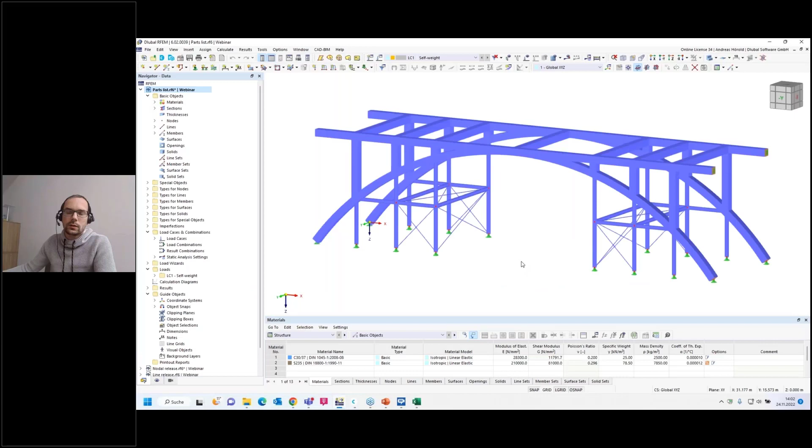Okay, then I will open the program and start with the first question. The first question is how to create a parts list in RFEM 6 and RSTAB 9. That's quite easy: you only have to click here, calculate, and then generate parts list.

Okay, I increase the table, and you can see there are concrete members and members of steel with different cross sections. You can see the volume, the unit mass, and the total surface area.

Now, maybe if the steel members will be coated with paint or something like that, you have the total mass, etc. Then you can change the table, showing by material the total mass of the concrete members and the total mass of the steel members.

And it's possible to export that parts list and open it in Excel. Then, if you want, you can modify the table.

For example, if you want to have only the steel members in the table, then you can delete the concrete members.

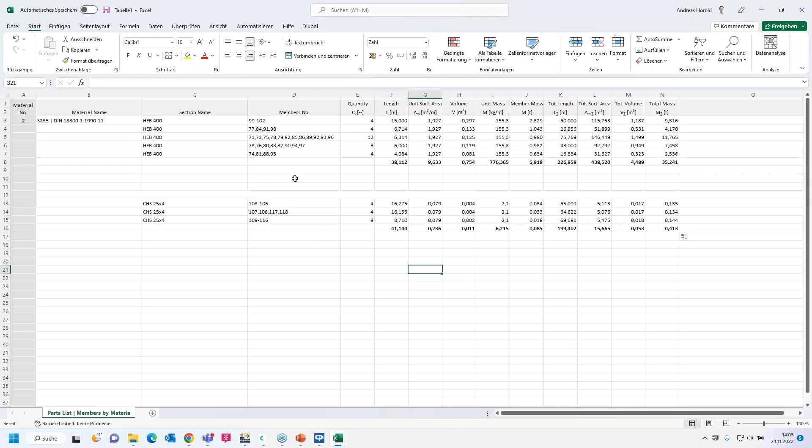Okay, I turn back to the program. It's also possible to print the parts list in the printout report.

I activate one and deactivate the other, printing only the parts lists in the printout report.

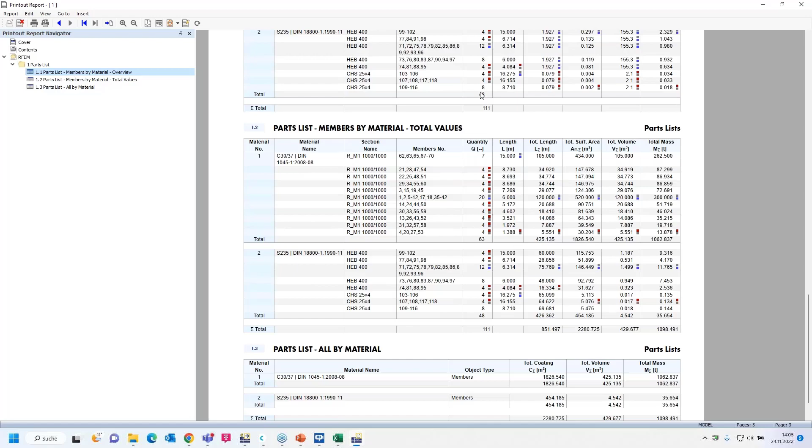Okay, now you can see the parts lists here. I can close the printout report and turn to the next question.

Now, before I do that, I change the model. The next question is how to release nodes and lines in RFEM 6.

Yeah, that's quite easy possible. I would like to show that on two examples: one example for a nodal release, one example for a line release. I start with the nodal release.

Now we have two members here, two beams, and the upper beam lies on the lower beam. Just imagine that they lie loosely on top of each other. That's not the case at the moment.

Just let me calculate or show the results. Yeah, the upper beam pulls the lower beam in the -Z direction. How do we change that?

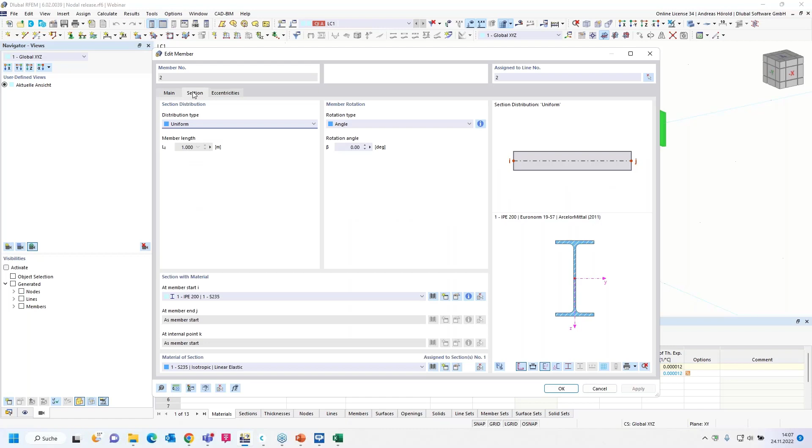Just for your info, there's an eccentricity. I open the beam and look at the eccentricity. The lower flange of the upper beam lies on the upper flange of the lower beam. That's the eccentricity.

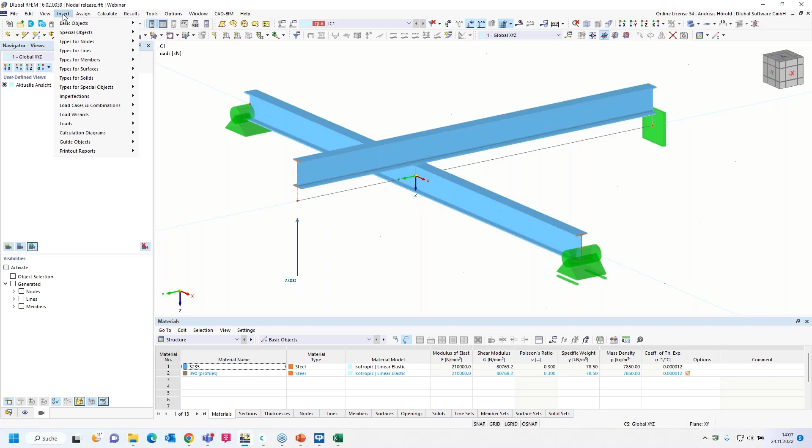Okay, so now we create a nodal release: Insert, Special Objects, Nodal Release. I open the dialog box, and I need to select the node, that node.

Then I have to define the nodal release type. There are different options. I would like to use the release in Z direction, and I use a nonlinearity. You can see here that there are different nonlinearities available, such as friction, diagram, and so on.

And I select 'fixed if positive VZ'. Now, if there is a load in Z direction, then it's fixed, but if there is a load in -Z direction, then it isn't fixed.

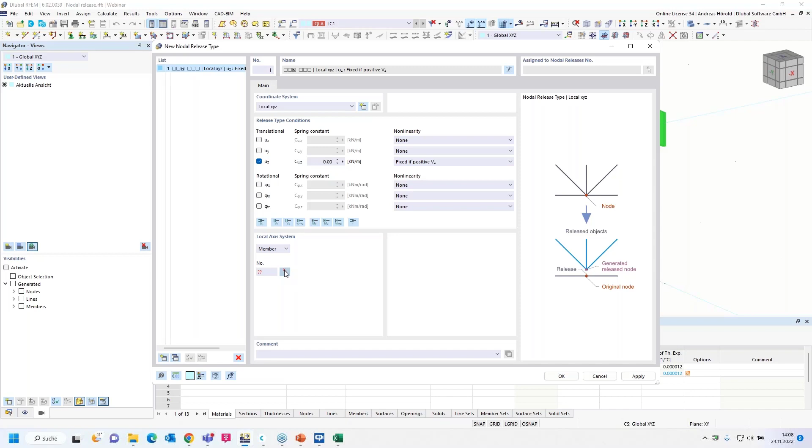Okay, I have to define a local axis system, and then I can close the dialog. And I would like to release the members number 2 and 4.

Okay, that's all. And I can calculate all.

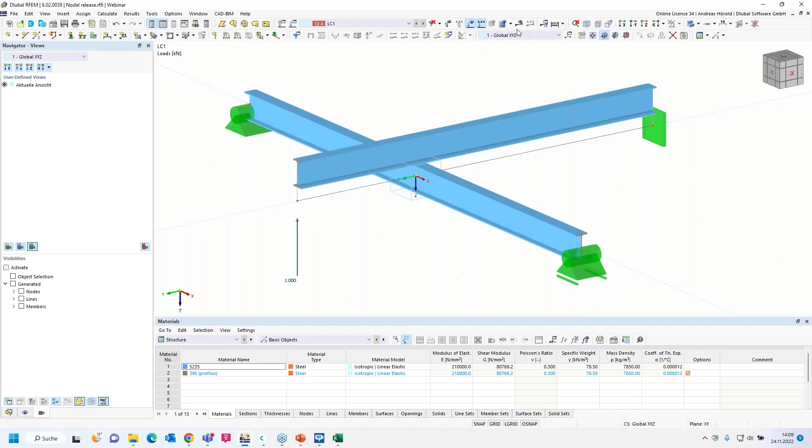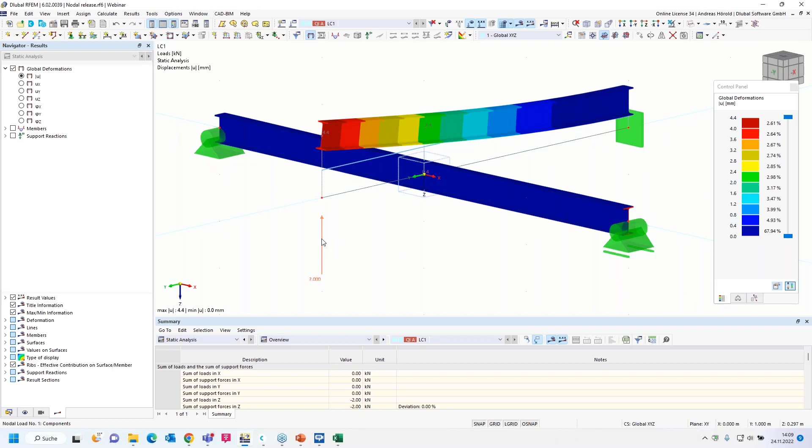So now I switch to the wireframe model, and now the upper beam can take off. And if I change the load in Z direction, then it should transfer the load to the lower beam. That's the nonlinearity.

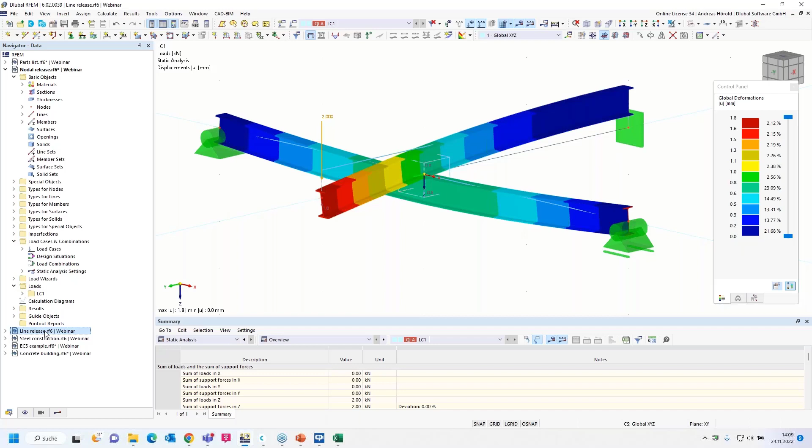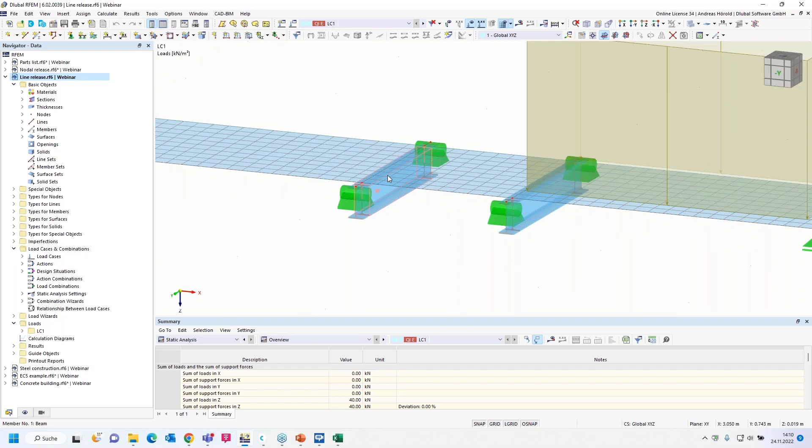So then I switch the model, line release. Yeah, the same principle, but in one dimension more. Just imagine that the plate here, in that case a steel plate, lies loosely on top of the beam. Then with that load, the surface should take off.

How to create that? Insert, special objects, line release, or line releases. So I have to define the line release type, use that as well, and the same nonlinearity. Fixed if positive uz.

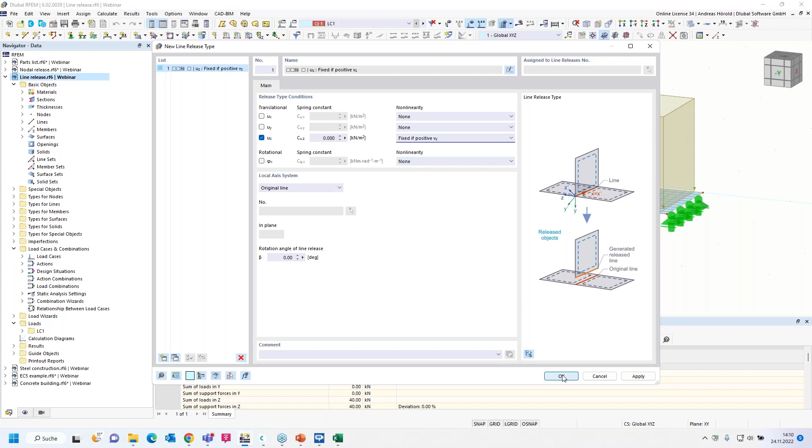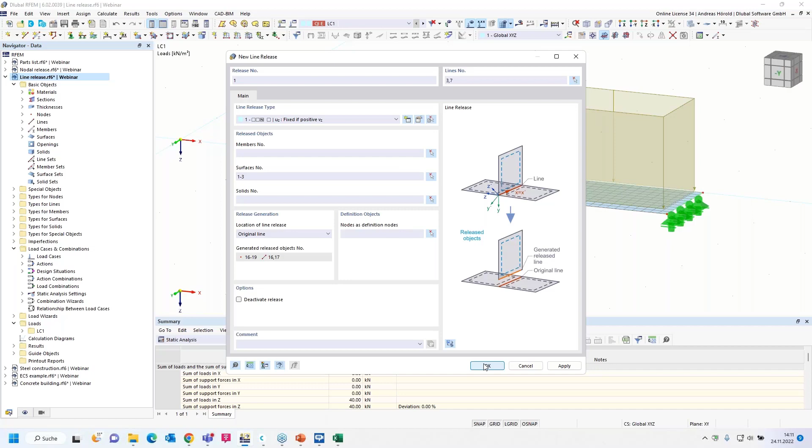I select the lines, and release the surfaces, all surfaces in that case. So now we need to calculate all. And now the plate takes off, or the surface.

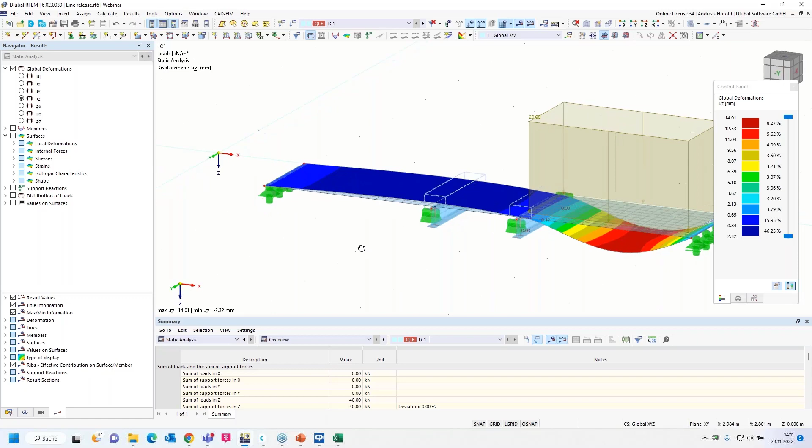Now you can use it, for example, if there is a concrete slab over the steel member, etc. You have got different options, as you could see in the dialog. Okay, that's all for this question.

Line and nodal releases. I go back to that model here, and the next question is, how can objects be selected by different criteria at the same time? Many customers look for the special selection function, which we know from our previous program versions. You could find it here above. But this function has been completely revised, and it's now called object selection, offering various advantages.

Now you can find it under guide objects here in the navigator data, and then object selection. I create a new object selection. This way you can select and edit several objects at the same time. The big advantage is that these object selections won't get lost, and they can be adjusted anytime. Now let's create more object selections so you can see the different options.

I start with basic objects, members, and the definition type basic. Now there are also more options available, types for members, loads. So I start with the definition section, and the section should equal HEB 400.

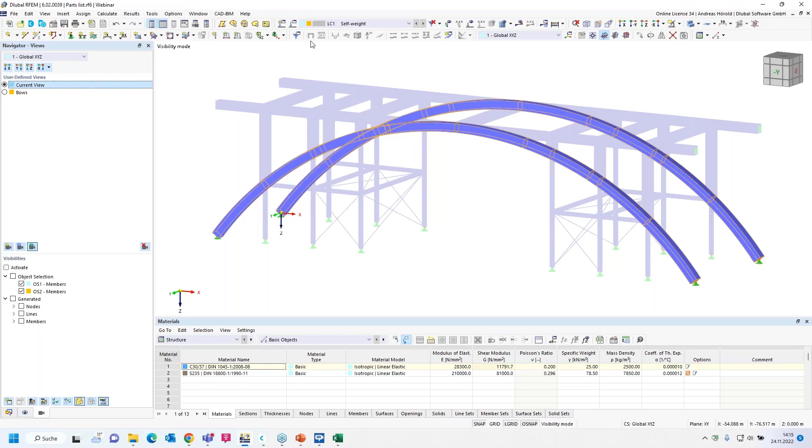And now only the bows are selected. So then I can change the visibility mode. Only the selected objects are in the view now, and I can create a new view, for example, bows. So if we cancel the visibility mode, then we can change the view again, and only the bows are visible.

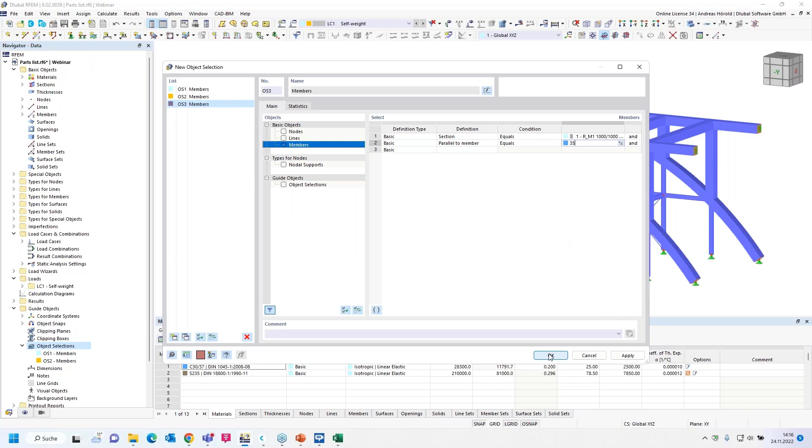Okay, so the last object selection, then it's done. Members, the section, again the concrete sections, the rectangular concrete sections, and parallel to member. So I have to select the member, for example, this one, and all parallel members are selected now.

Okay, that's all to this question. I changed the model, a simple steel construction. And the question is, is it possible to perform the steel design only for selected members or member sets in RFEM 6 and RSTAB 9? Yes, such a design is still possible, not only for steel design, also for aluminum design, concrete design, timber design, etc.

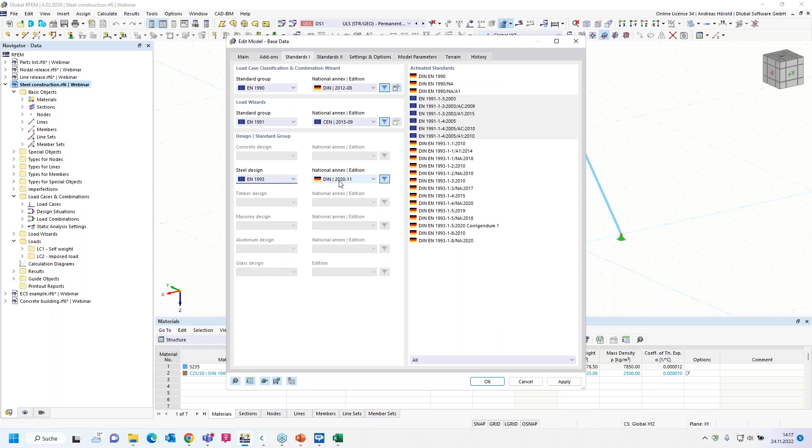Just change over to the table, or I select here in the base data the add-on steel design. I select the standard, Eurocode 3, and I select the German standard, but that doesn't matter. Okay, and I start the steel design, in that case for all members.

Okay, we get results, we get an error message, the stability design could not be performed. We didn't define effective lengths or boundary conditions, but that doesn't matter. That's not what I would like to show.

But when I go back to the input data, then for example to that table, you can select the design situation, for example if you only want to do ultimate limit state design. And in the next table, you can select certain members or sets of members for the design. So I would like to show how to design not all members. I select, for example, only the platform beams.

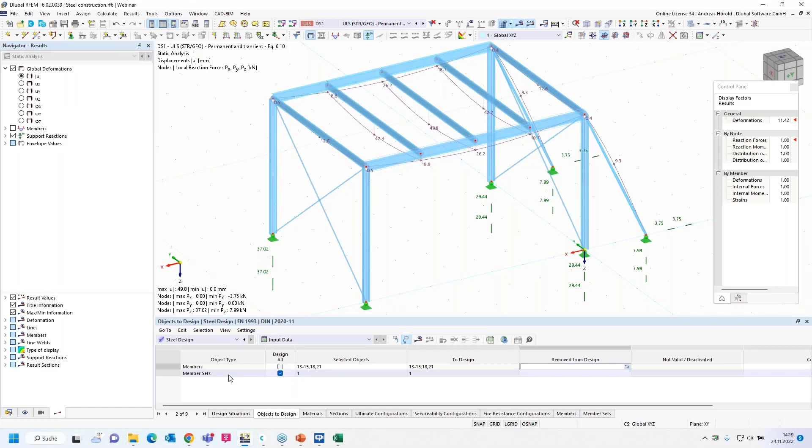So, and the one member set, and I start the calculation again. Okay, and now you can see only the platform beams and this member here, the member set, have been designed. As I said, also valid for the other add-ons, the same workflow for all.

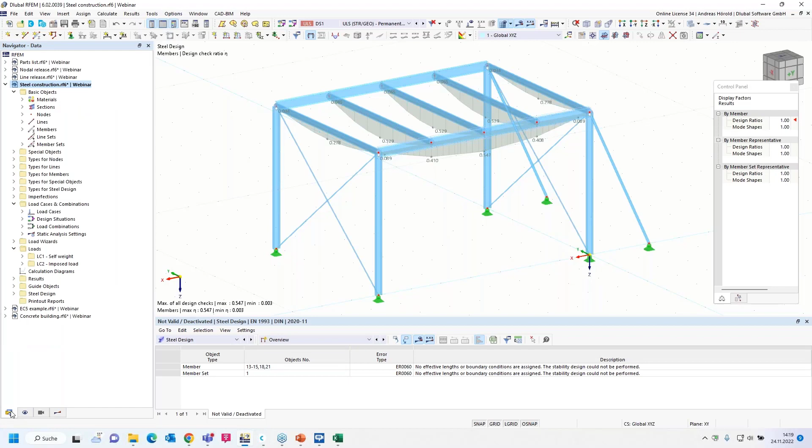Okay, then we turn to the next example. And the next question is, where is the setting for the shear stiffness of members? Usually you only have an effect when you have a compact cross section, and considering the shear stiffnesses can be controlled separately for each cross section in the edit section dialog box.

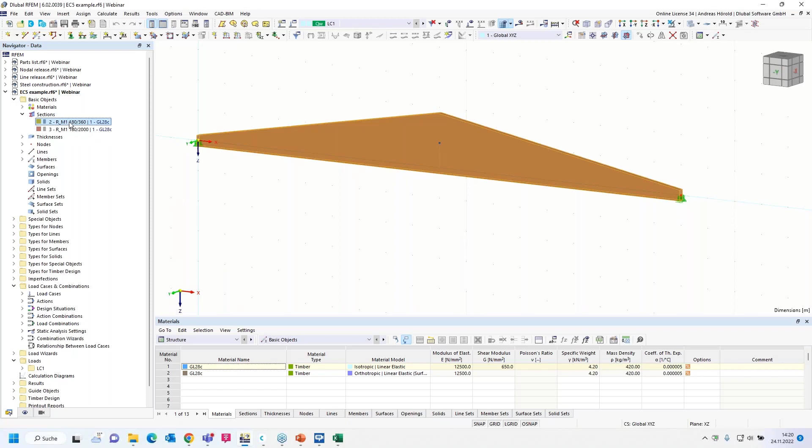So how to find the sections here? Left on the left side, and navigate to data, you can find the cross sections. The cross section at the beginning and in the middle. And if you double click on it, you come or turn to that dialog.

And if here deformations are considered, a deformation increase due to shear forces will be the result. Let's take a look, that's the default setting. And let's take a look at the results: the deformation is 24 millimeters. And let's deactivate the shear stiffness. Okay, and you can see the shear parameters are grayed out.

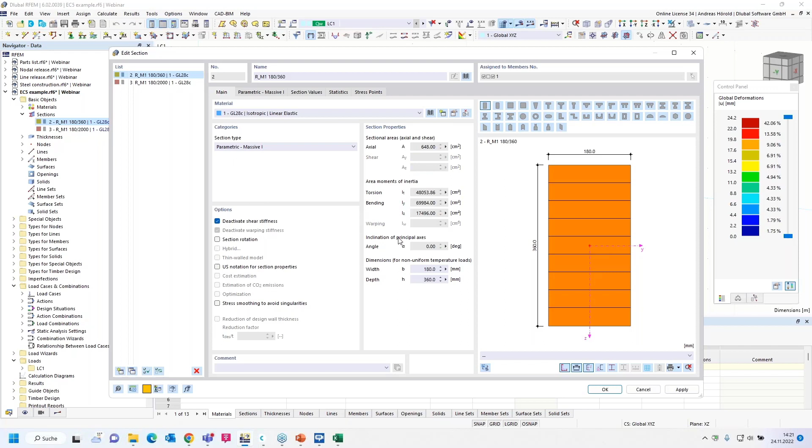So, we have to do that also for the other cross section. Then let's calculate everything again. Before our change, we had 24 millimeters, and now we have got 21 millimeters.

We got this question because there are different results in comparison with the hand calculation, and so on. Now you know how to deactivate the shear stiffness.

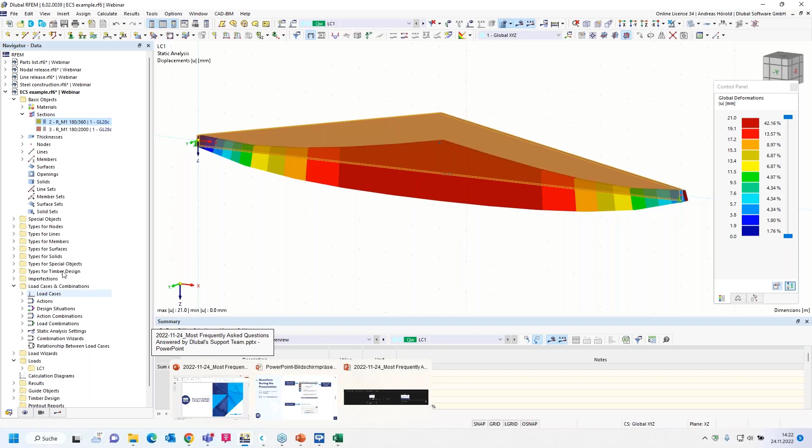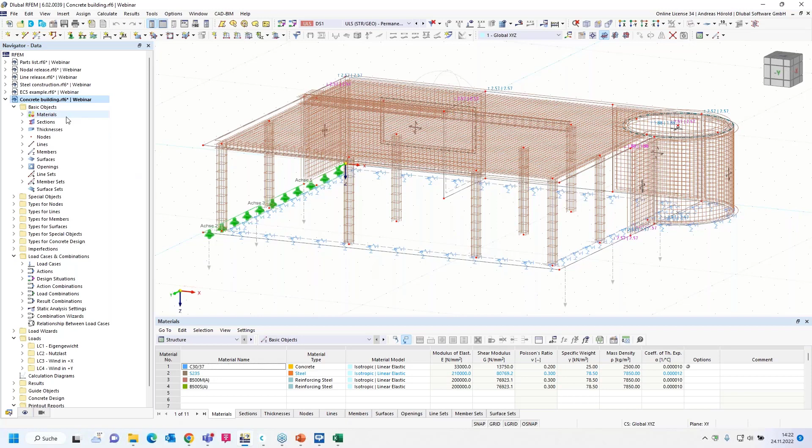Okay, then we turn to the next model. So the next question is, can I switch off the display for the reinforcement in the model? Yes, that's possible. All types available for the concrete design can be displayed graphically in the work window. Let's switch to the navigator display, and you can find here types for concrete design.

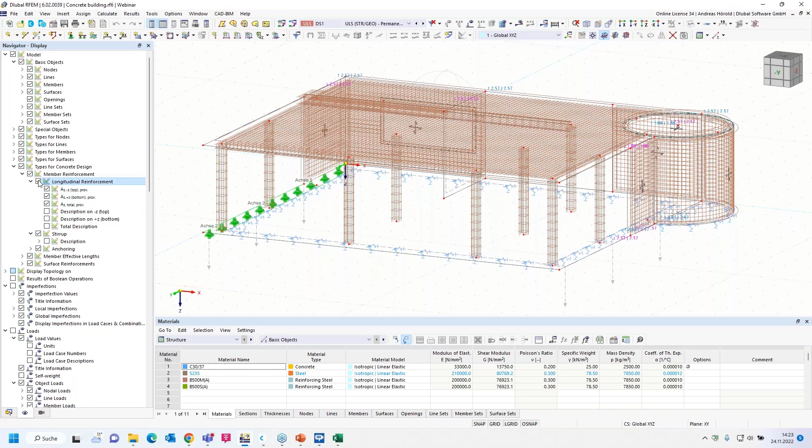There are different options. You can disable the longitudinal reinforcement, the stirrups, then the surface reinforcement. Now we don't have any stirrups here.

Different options. And then you can print such graphics, like maybe one graphic with the longitudinal reinforcement and the stirrups, and one graphic with the surface reinforcement. Can you display, can you print that in the printout report? Yeah, as you could see, it's quite easy to disable it and show that.

Okay, then we turn to the last question for today. How can I properly unlock my license again? Yeah, that's for example valid or important when you have got a network license, or you use your license on different computers, or you share the license with colleagues and so on.

Usually the license will be unlocked a couple of seconds after closing the program, after the borrowing time or the blocking period when a crash has expired. The maximum borrowing time is 30 days. And if you have got a crash and you don't open the program again, then the blocking period is 24 hours.